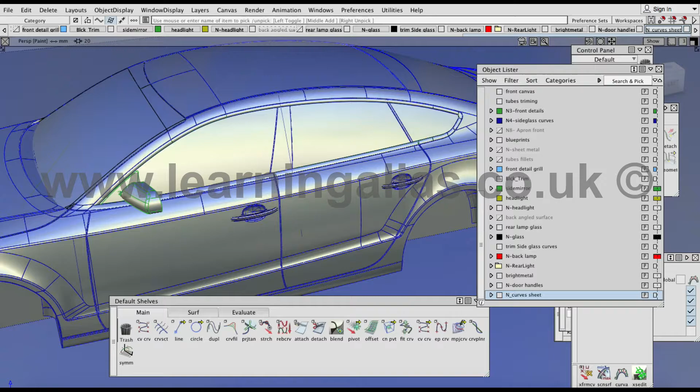Guys, in this video we're going to be creating, or it will be an overview on how to create, this piece of detail here, the side bright trim metal here. This piece I have here in your layer, this piece of metal we have here.

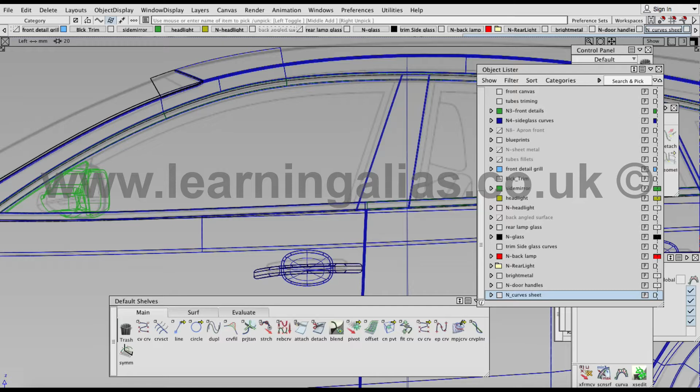So you will have to offset the curves you use to trim out the sheet metal, and you will have to offset them inwards, so then you can project those curves onto the actual side glass surface, and you will have something to support the bright metal trim.

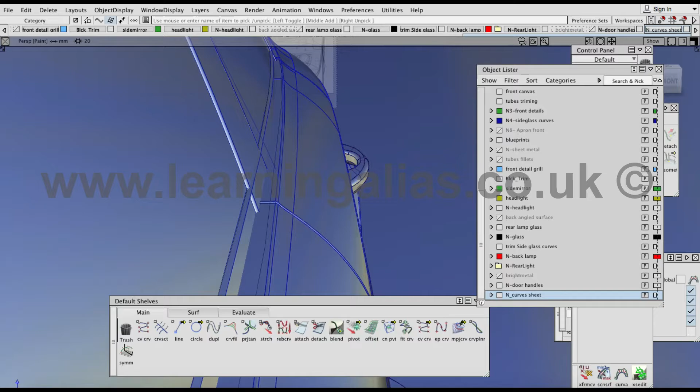Once you project those curves, you can create a draft from the curves on surface, and you will create this surface you see here coming out the side glass, and that will be the other piece of surface to support our bright metal trim. So once you've done that, I want to be creating a piece as an example for you. So I'm going to be creating a little piece of this bright metal for you.

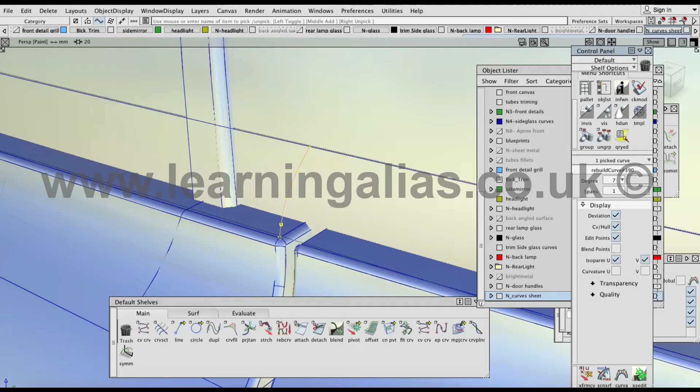Here I created a 7-degree curve. You can use a 5-degree curve, and here I have another one, and as you can see, it's starting on the draft we built from the side glass, and then it's finishing near the fillet down here we have.

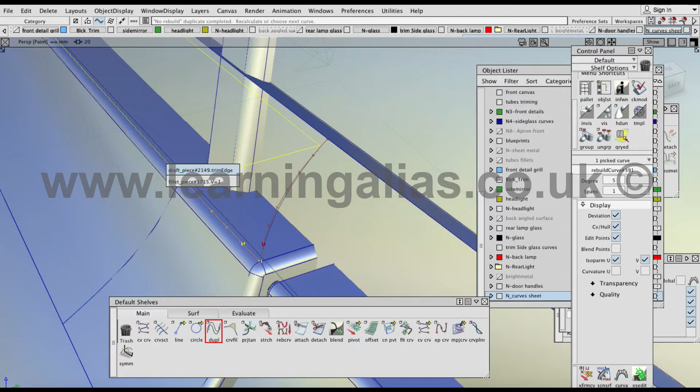So we're gonna be using the square tool to create a surface, but first we need to create a duplicate onto these curves here. So I'm just creating curves from the surface boundaries, and now I'm gonna use the attach tool again with connect and 0 distance, and I'm gonna attach these 3 curves and create only one. So that will be one boundary for our square surface.

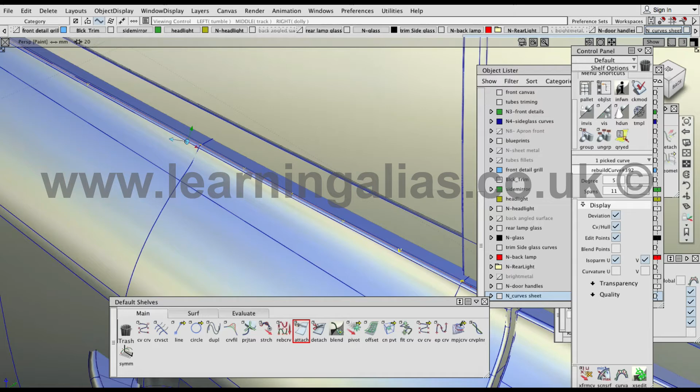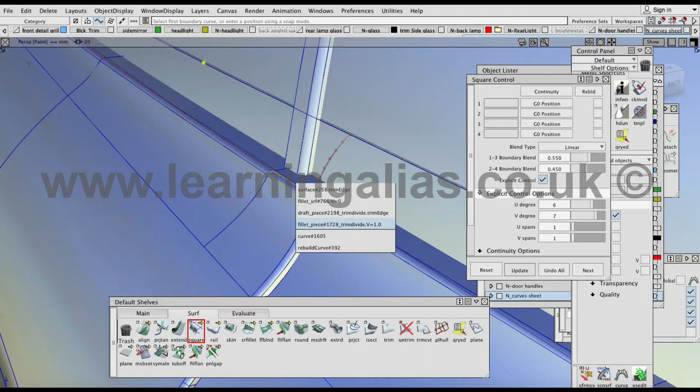I pick this last one here, and that will be all these 3 curves joined, and now I can use the square tool with all the boundaries set to position, and I'm gonna pick these curves and all the boundaries, this one, the draft, and then the other one, this other curve here, and create this piece.

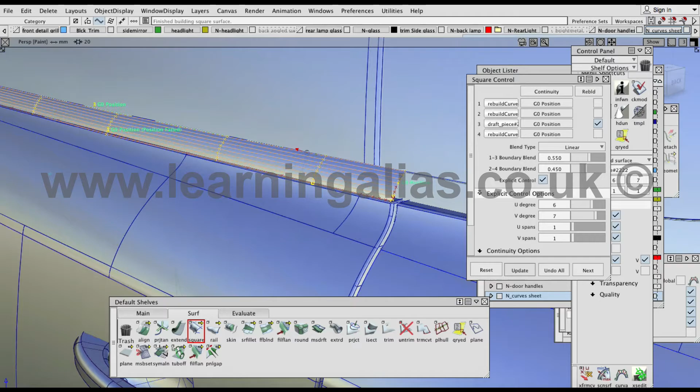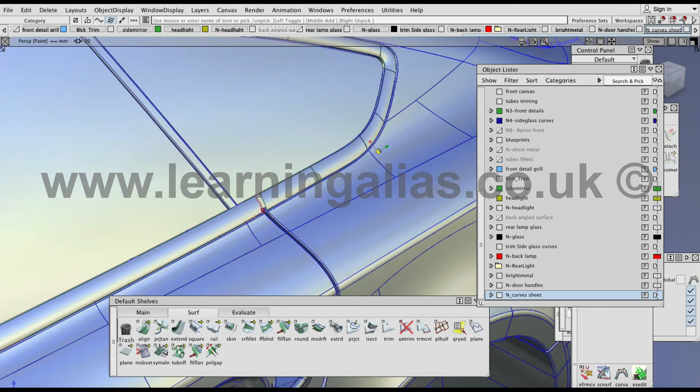I'm gonna turn the controls on and see what we've got. We have a little bit of twisting here, so I'm gonna change the rebuild option for the boundary 3, and we have a better CV structure here. So the process for the rest of the bright metal will be kind of the same. So you can use the same profile curve we use, the 7-degree curve, or it can be a 5-degree curve if you like. So you will have to do the same process for the rest of the patches.

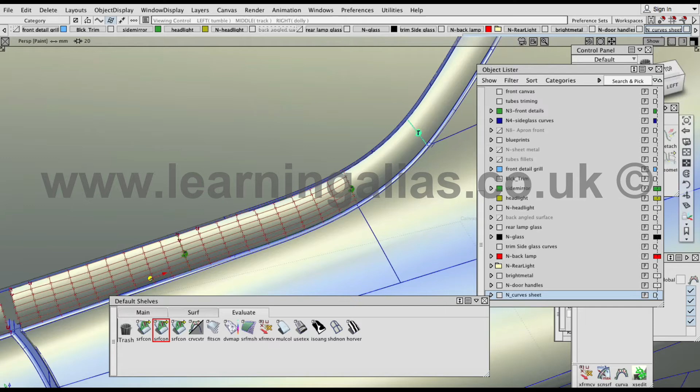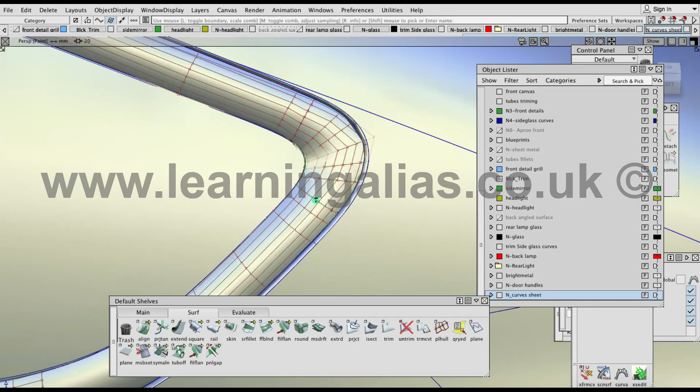I'm going to show you the CV structure here of these ones I have from the finished piece. So as you can see, we have kind of separate pieces, but we're trying to get tangency between them. So I'm checking that I have tangency here. If you don't have tangency, you can use the align tool with the G1 alignment to get a proper alignment in all the pieces here. You can see also that I have very nice CV structure too, so everything has to be in place.

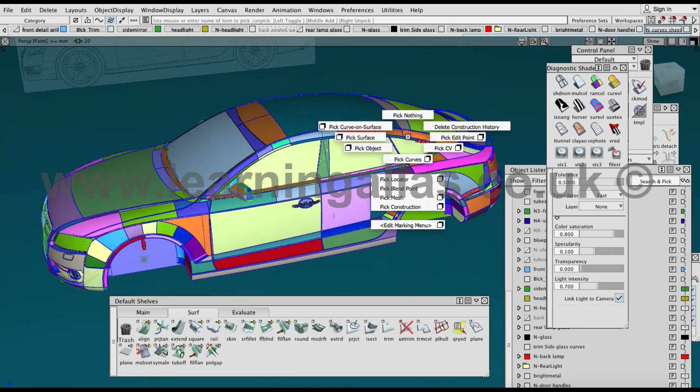And yeah, that's the way we created all these surfaces here to create a bright metal piece, and you can create a layer with this detail and put all the surfaces there. So you're seeing here the different patches I've got on my car, so it's better to see the patch layout.